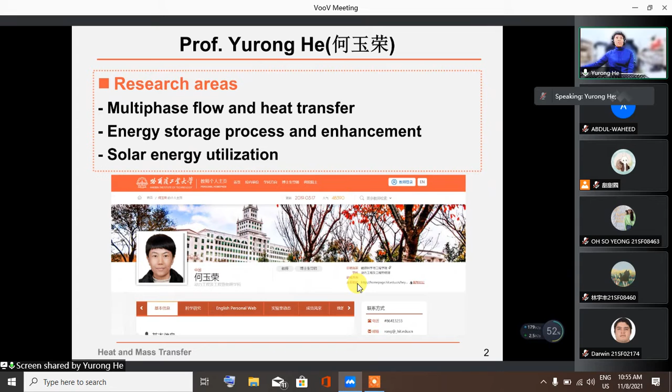My email address is rong@hit.edu.cn. This is the homepage, and the WeChat group, you can see my WeChat ID there. This is my homepage. And Dr. Tang, can you introduce yourself first?

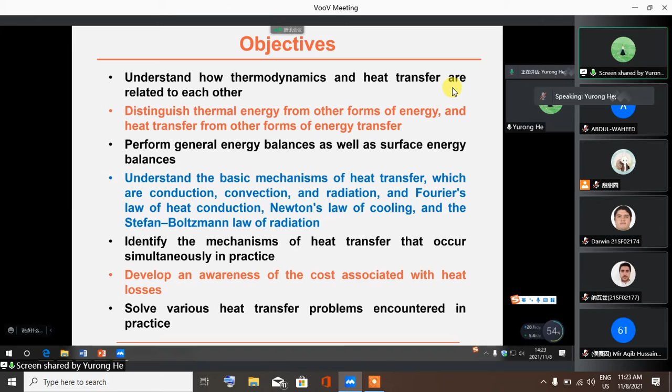Develop awareness of the cost associated with heat losses. Heat losses are very important when you make a heat balance and solve various heat transfer problems encountered in practice. When we learn heat transfer, we would like to solve problems encountered in practice, maybe in industries, in life, and in other areas. This is the objective of this chapter and this course.

First, we would like to distinguish thermodynamics and heat transfer. They have a relationship with each other, but they are different.

What is heat? Heat is the form of energy that can be transferred from one system to another as a result of temperature difference. So there is a very important word: temperature difference. Heat is the form of energy that can be transferred from one system to another as a result of temperature difference, so the reason heat happens is because of temperature difference. From one system to another means there will be a system, and the heat, the energy, will be transferred from one system to another because of the temperature difference. That is heat.

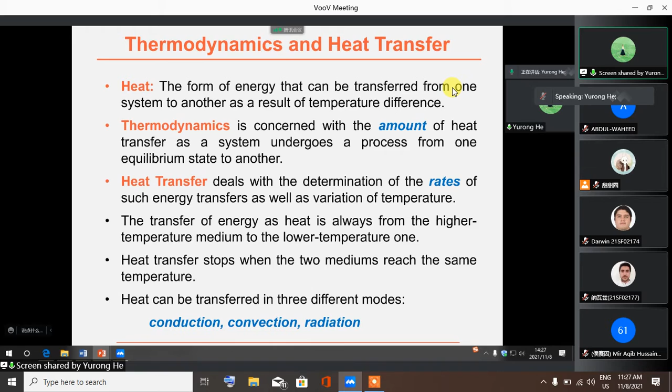So we would like to know how long until I can drink this hot coffee. The hot coffee in the thermos bottle will be cooled to a certain temperature, which cannot be determined from a thermodynamic analysis alone. If you learn thermodynamics, you can set up a balance, but you can't solve this only by thermodynamics. We will use heat transfer knowledge to solve this problem, to know how long until you can drink the warm coffee, not the hot coffee.

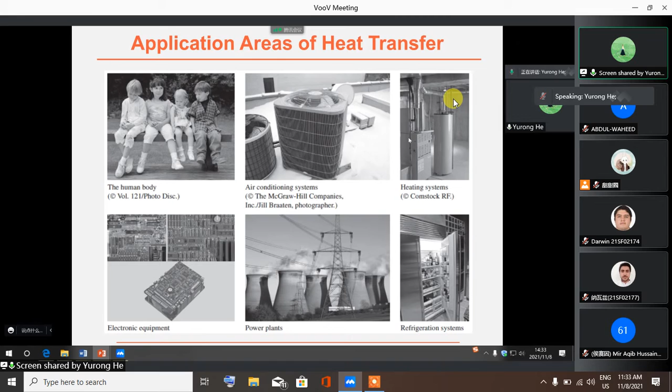And this is the refrigeration systems in your life. When you're at home, you will use that to find out a cold beer. Maybe this is cold beer inside. This is the application areas of heat transfer in your life and in industries.

And what is the history of heat transfer? We will look at it. In the early 19th century, heat was thought to be an invisible fluid. At that time, people were not very familiar with heat. What is heat? They didn't know that. They thought heat was an invisible fluid, like something called caloric, that flowed from

That is heat transfer. People treated molecules as tiny balls at that time. They thought they are in motion and thus possess kinetic energy. So the energy associated with the random motion of atoms and molecules is heat. This is the history of heat transfer.

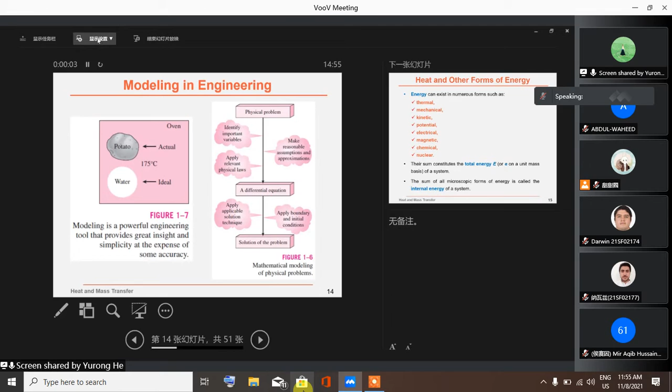Just now we introduced the heat transfer engineering problem classification. So this is how to do a modeling in engineering. Look at the figure. This figure is a very easy problem for heat transfer.

This potato in the oven: here is a potato. This is the actual problem for engineering or for your life. But if we simulate this problem and solve it, we will do some assumptions. We think this potato is this water part, and the irregular shape is a circle face. This is the ideal model.

So modeling is a powerful engineering tool that provides great insight and simplicity at the expense of some accuracy. You see the potato like this, and we assume it's like a circle. This is the actual potato, and we assume that it is water at some temperature.

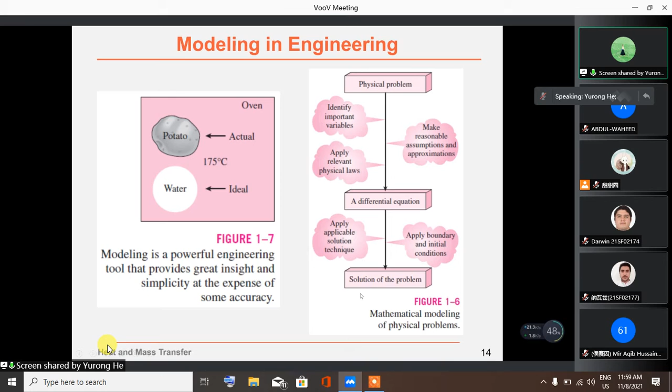So before we solve one exact problem, we need to know many concepts. First, heat and other forms of energy. Energy can exist in numerous forms, such as thermal energy. Thermal energy is very common. And mechanical energy - some students from mechanical engineering will know this. And kinetic energy, potential energy, electrical energy, magnetic energy, chemical energy, nuclear energy.

Look at those energies. Nuclear energy relates to magnetic energy and electrical energy, and relates to many popular research topics. You can use electrical field, magnetic field, to solve some nuclear engineering problems. So those energy types are very important when you solve industry or research topic problems.

There are some components that constitute the total energy E. The capital E is the total energy, which is all those energies together. And if the energy is on a unit mass basis, the sum of all microscopic forms of energy is called the internal energy of a system. The internal energy may be viewed as the sum of the kinetic and potential energies of the molecules.

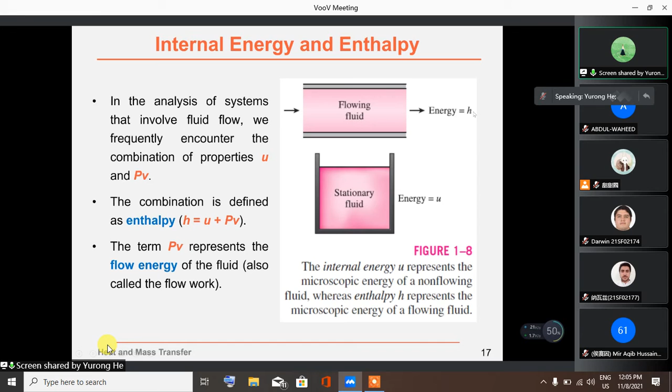And other concepts about this, specific heat of gases, liquids, and solids. We use specific heat usually to calculate heat transfer problems. The energy required to raise the temperature of a unit mass of a substance by 1 degree is

Two kinds of specific heats, you know that from your postgraduate, maybe in your middle school or undergraduate study. You know the specific heat, CV and CP. What is CV? The specific heat at constant volume. And what is CP? It's the specific heat at constant pressure.

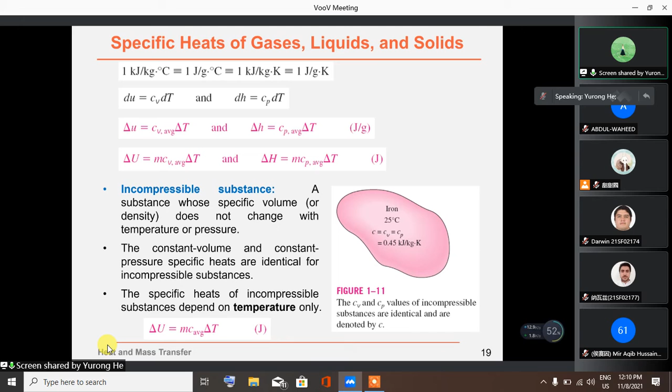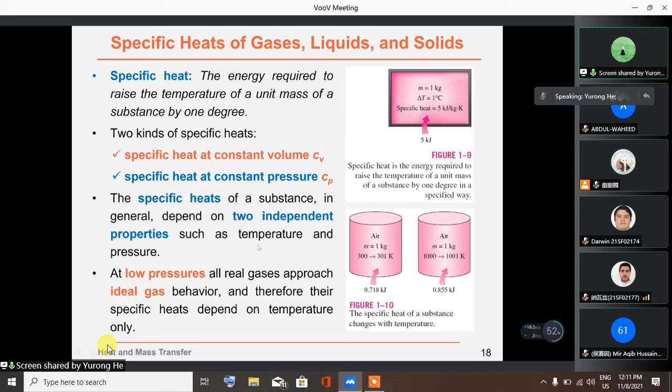Just now we introduced CV and CP, the specific heats. And I told you it looks like a very easy concept, but it's very important when you do energy storage problems. Thermal storage is very popular and very important for storing energy, especially for students in the School of Energy Science and Engineering. And if you're in the mechanical engineering school, you do some problems related to energy storage. So it's a very important variable, CV and CP. Remember that?

Energy can be transferred to or from a given mass by two mechanisms: heat transfer and work. What is heat transfer rate? This is heat transfer rate. And what is heat flux? This is heat flux. Heat transfer rate is the amount of heat transferred per unit time—the total amount of heat divided by the time difference. So you can get the heat transfer rate.

And what is heat flux? Heat flux is the rate of heat transfer per unit area. So the heat transfer rate divided by the area gives you the heat flux. And this is how you calculate the area. The area is normal to the heat transfer direction. This is the area.

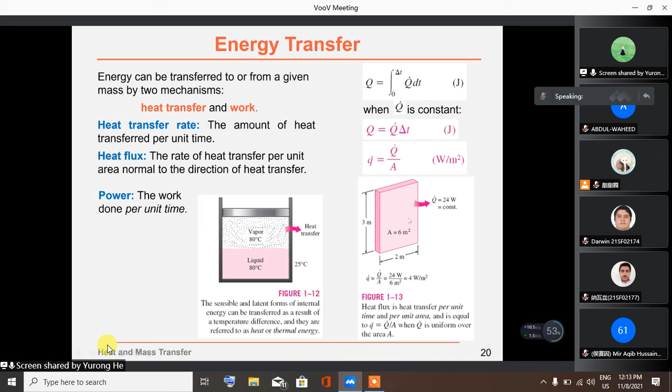And for thermodynamics, we have several laws. The basic one is the first law of thermodynamics, which is the conservation of energy principle. It's important for heat transfer problems. The first law of thermodynamics states that energy can neither be created nor destroyed during a process—it can only change forms.

So this is the energy balance equation. Look at that: the total energy entering the system minus the total energy leaving the system equals the change in the total energy of the system.

So the net change in the total energy of the system during a process is equal to the difference between the total energy entering and the total energy leaving the system during that process. This is the energy balance equation.

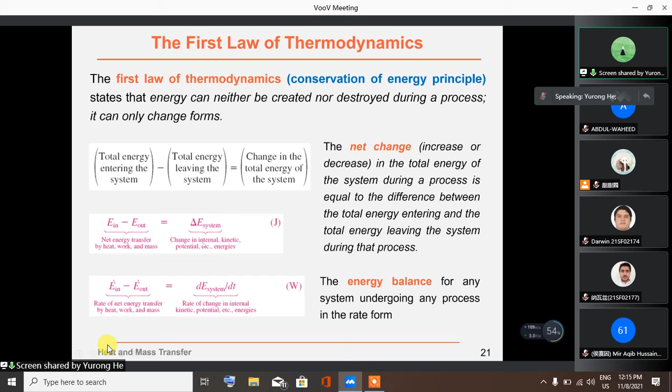So the steady rate form for the first law of thermodynamics, you can see this. For the E input, E output, you can see this is the change in energies. But for a steady system, there is no this part. For a steady state system, there is no change in the energy. So the rate of net energy transfer in equals to the rate of net energy transfer out.

So the E in equals to E out. Look at the figure on the left. In a steady operation, the rate of energy transfer to a system is equal to the rate of energy transfer from the system. If you solve a problem related to heat transfer, then you have a system. If the system keeps steady, you can use this.

The E input equals to E output. So what does E input include? It includes the heat input, work input, and the mass input. And what does E out include? Heat, work, and mass output.

So in heat transfer problems, it is convenient to write a heat balance equation and to treat the conversion of other energies into thermal energy as heat generation. If you think of other problems, energies in the heat balance equation, you can think of these other energy forms as the heat generation. Then you can write the thermal or heat balance equation like this.

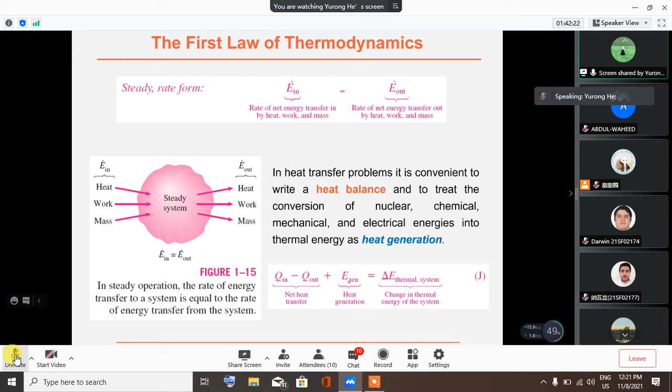But for other energy forms, for example nuclear, chemical, mechanical, and electrical energy converting into thermal energy, we can use heat generation for that. For the equation, the heat generation for chemical energy, we think of it as heat generation here. So we can list that term in the energy equation, the heat balance equation, like that.

And this one is a closed system. There is a top cover here. So in the absence of any work interactions, the fluid is stationary inside. So the change in the energy content of a closed system is equal to the net heat transfer.

Like this, the energy in minus energy out equals C m ΔT. C is the specific heat, CV. M is the mass of the collar, and T is the temperature of the collar, and the specific heat is the collar's specific heat value for that.

So you can list the energy balance equation like this: E input minus E output equals m multiply CV multiply ΔT, like that. This is for a stationary closed system. It's very easy to list the heat balance equation like this.

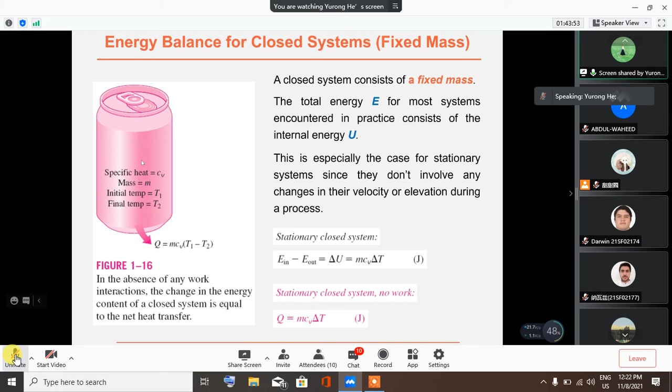And for the energy balance for a steady flow system, just now the system is stationary, the fluid is not flowing. But if the fluid is flowing through this tube, through this channel, what can we do?

Many engineering devices such as water heaters and car radiators involve mass flow in and out of a system and are modeled as control volume. Control volume is an important word, you remember the control volume word. Most control volumes are analyzed under steady operating conditions. The term steady means no change with time. Unsteady means change with time at a specified location.

Look at this one. This is the mass flow rate of a fluid at a cross section. This is equal to the product of the fluid density, average fluid velocity, and the cross section area. This is for the cross section.

And for this one, under steady conditions, the net rate of energy transfer to a fluid in the control volume is equal to the rate of increase in the energy of the fluid stream flowing through the control volume. You can see this the inlet, this the outlet, this is the control volume. For this control volume, from the inlet, the energy in, this outlet, the energy out. So we can see the energy transfer for this is m Cp ΔT, and m is the mass flow rate.

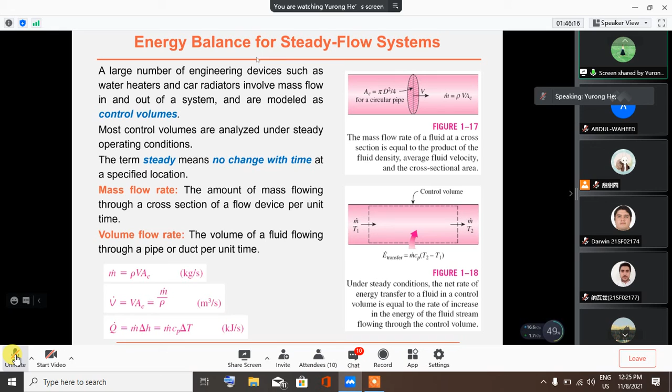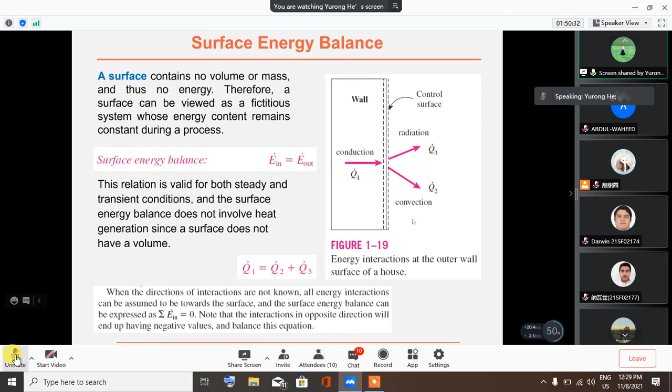Thank you, Professor. Yeah, thank you. Thank you. See, Professor. See you next time. Yeah, see you on Wednesday.